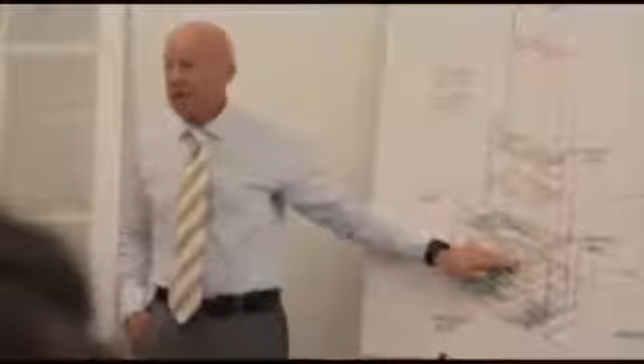It's the quest for something which is more flexible, more adaptable to future change, because it has fewer column interruptions. Ideally, at the base of the building, you'd like big footprints and tall space. In the mid part, something like 150 by 70 feet, you'd like a different kind of space.

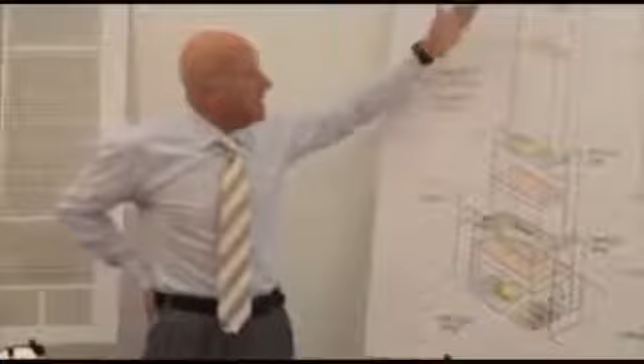And when you start to get those extraordinary views over 300 feet out to the park and so forth, you're looking for the qualities offered by a smaller footprint. From the outside, you really want to maintain that urbanity, the existing levels that work with the adjoining buildings, and indeed all the buildings in that area.

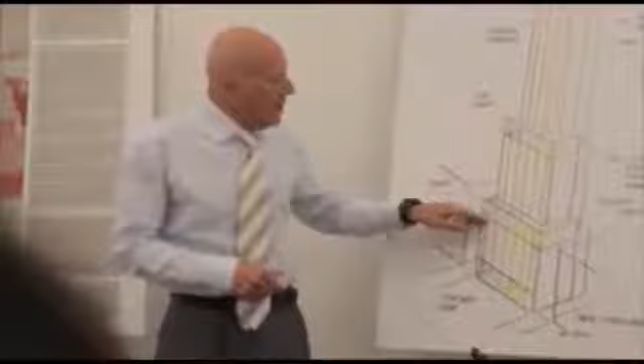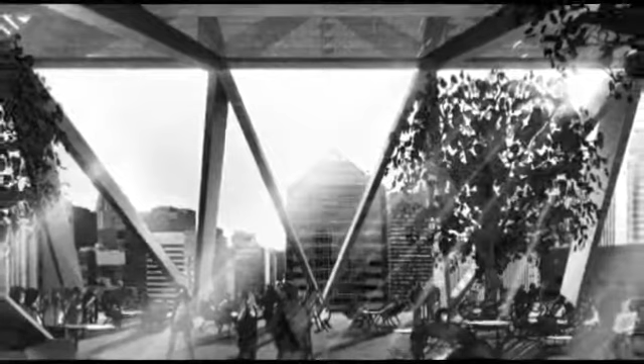The opportunity of celebrating the setback, in a way, is something that could emerge in terms of the relationship between design, market research, and marketing. And the way in which you increase insulation and performance, the way in which you introduce a more beautiful treatment to this, may well generate a special product.

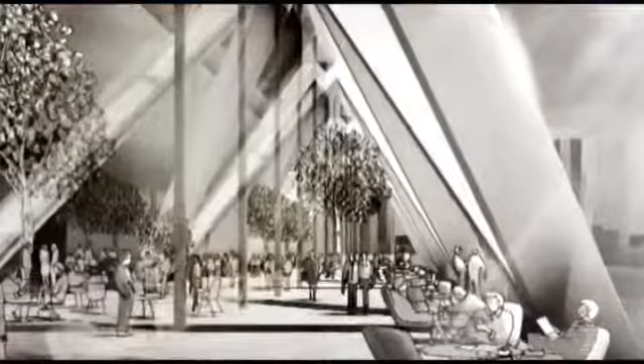We have some ideas which we can elaborate on, very much about creating special units which will alternate between a kind of prismatic glass, a sealed unit, not just a single sheet, for higher insulation, alternating with clear glass, and these reflect the light. So you could have a very beautiful quality from the inside and an extraordinary quality from the outside, which is not just a bland glass, a dumb greenhouse. I think it's much more subtle than that.

So in this visualization, and you'll see further visualizations later, these become, in a way, quite subtle and combine the vertical and the 45 degrees. I forgot, I did introduce this right at the last moment. I put the building in here. It fits very beautifully, and this is reminding me that it's identifiable, but very much, for me, a New York building.

I think to be distinguished and notable, this building doesn't have to indulge in a kind of look-at-me hysteria of sculptural shapes and so on. We feel that this expression of the grid and the 45-degree geometry is absolutely right for the building and for the neighborhood.

Something triggered an awareness on our part, which was that most of our perception of this building had been really very much from this viewpoint, but the views from the east are quite significant. And also, whether that's the views to the building or the views out of the building. You placed a very high priority on these corners here.